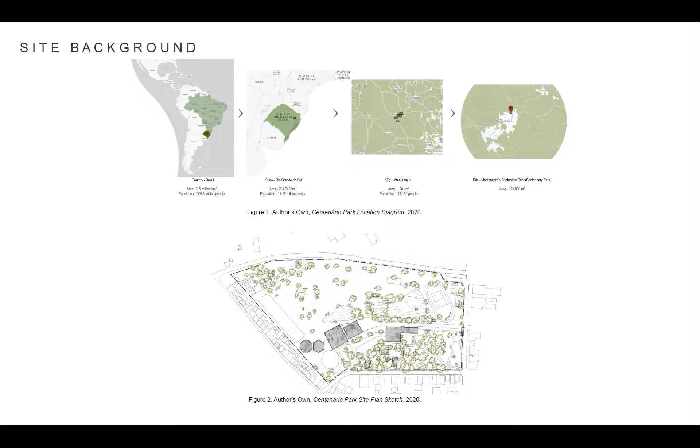Here, a location diagram. So we zoom into Brazil, then zoom into the southernmost state of Brazil called Rio Grande do Sul. Then we zoom into the city of Montenegro, and finally zoom into Centenario Park. Centenario means centenary, and that's because the park was founded on the city's 100th birthday in 1973.

The current problem being addressed in this thesis is the current rundown condition of the site. Because of neglect and vandalism over recent decades, the quality of the spaces and the buildings have declined drastically, also with the shutting down of facilities. And this is something that I witnessed as well living in the city when I was younger.

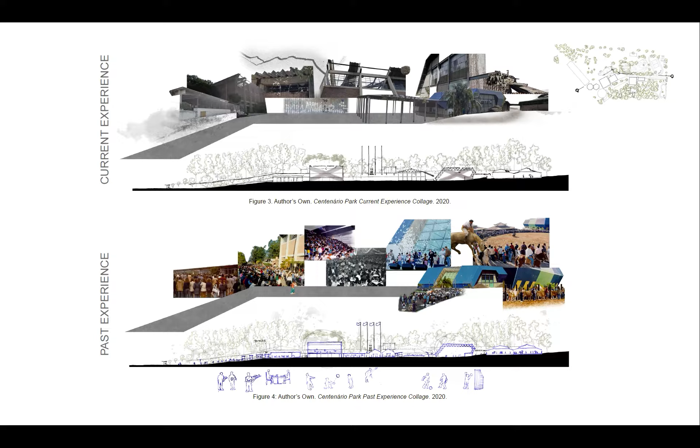The past experience of the site, however, is very different. It used to be a lively showground for cultural, recreational, and sports events of the region, a place of collective memory for people. So this study looks at bringing back some of this life to the current dilapidated site.

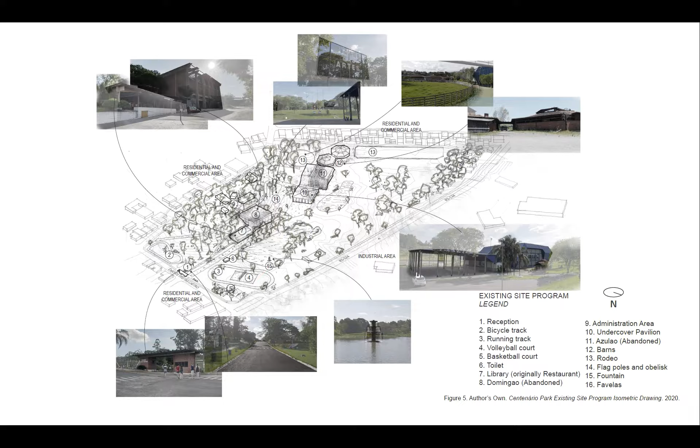And on the right, we can see a sign that reads City of the Arts, and that's placed in Centenario Park, acknowledging one of the city's titles in the region. Between the years of 1973 and 2019, there have been considerable developments both within the site area as well as the surrounding city.

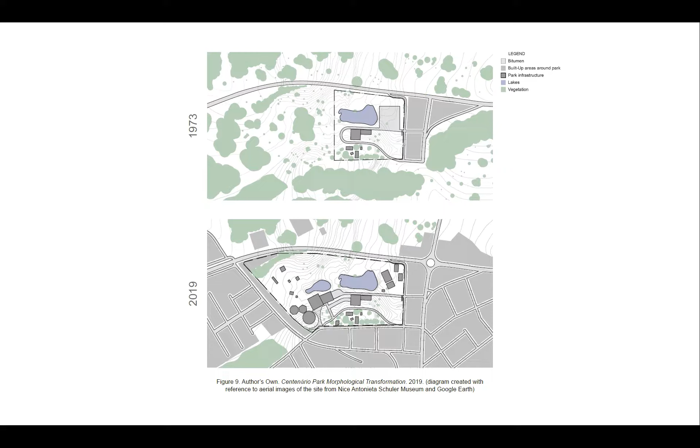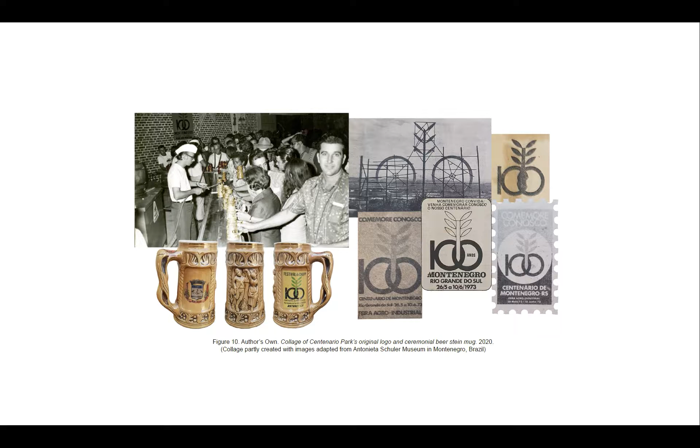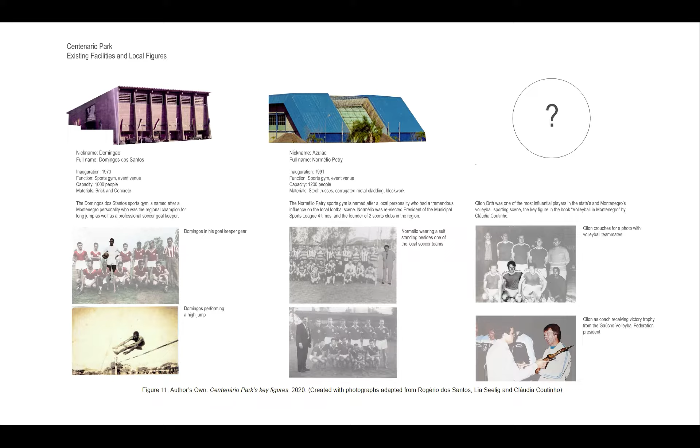And there's a logo that's associated with Centenario Park that you can see here, and it's something that's been largely forgotten over the course of time and something that I'd like to reinstate as part of the proposal. Also worth mentioning is that the two main buildings of the site, the sports gym buildings Domingão and Azulão that you see there, are named after important local figures of the region's sports scene.

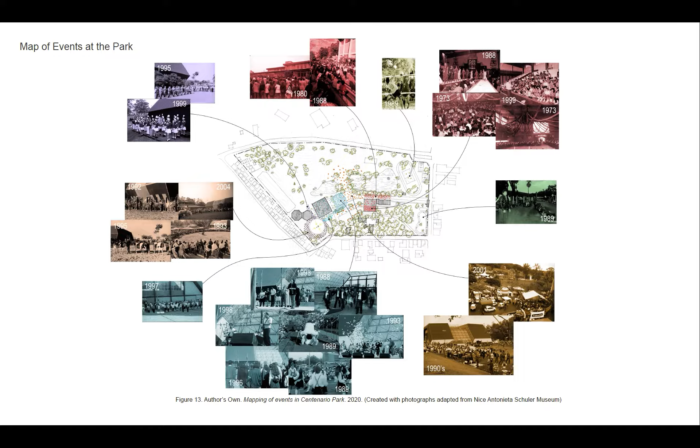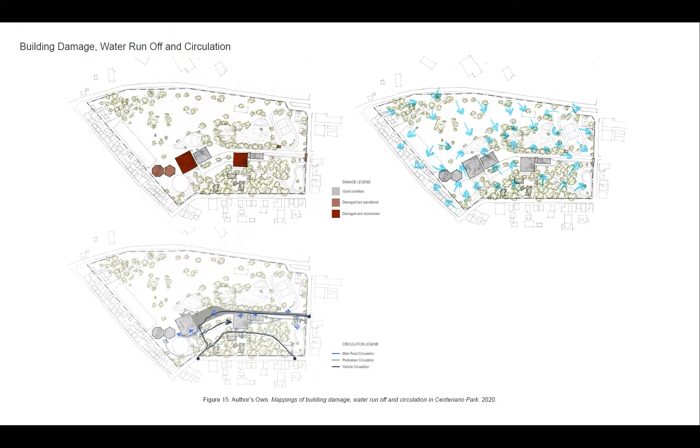I then conducted some mapping exercises here on the site plan: mapping zones, mapping events at the park to understand how people occupy the spaces, mapping key moments as we come into the site and traverse that central road of the park, mapping of building condition, water runoff and circulation, and some site section elevations and diagrams that are taken through the length of the park.

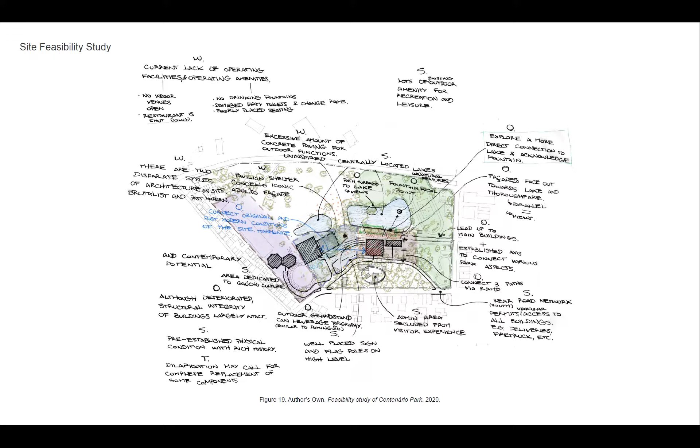Entering the methodology portion of the study, the first thing I did was come up with a set of design rules to help inform where and how to intervene in the park site. And that's because it has a very big area of 120,000 square meters, and there's a lot happening on the site.

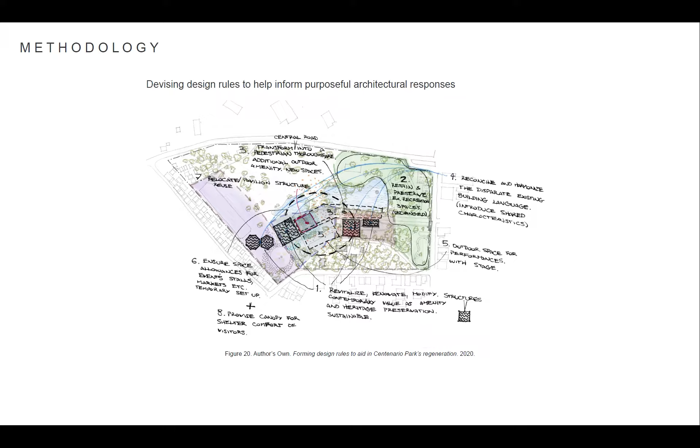So these rules outline that beyond the revitalization of the existing heritage structures, it also looks largely at the creation of outdoor spaces that can supplement the cultural and functional uses of Centenario Park, because there hasn't been noticeable development of these areas on the site.

And these spaces are to embody an architectural ideology that is Brazilian modernism. Now, the 20th century was a time where European design principles predominated at a national level, and a time where Brazilian architects were looking for ways to distinguish their buildings from those of Europe, and in this process, trying to find a uniquely architectural style that's referential of Brazil.

The following case studies that I'll show you are from Brazilian architects that align themselves to varying extents with this architectural ideology in their search for an authentic design style. And also, I believe that each one had a takeaway or a key lesson that could be reinterpreted in the context of Centenario Park. The first one is Lina Bo Bardi's SESC Pompeia in the city of São Paulo.

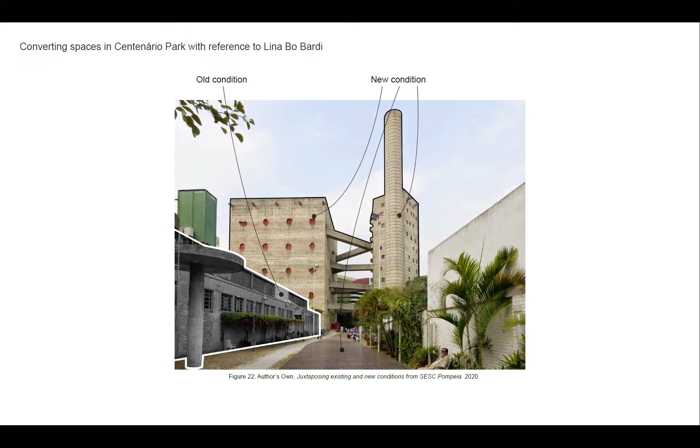It is a leisure center that consists of a revitalized heritage condition of the site, as well as the implementation of a surrounding environment to accommodate the new social program. And jointly, they form this leisure precinct in the city.

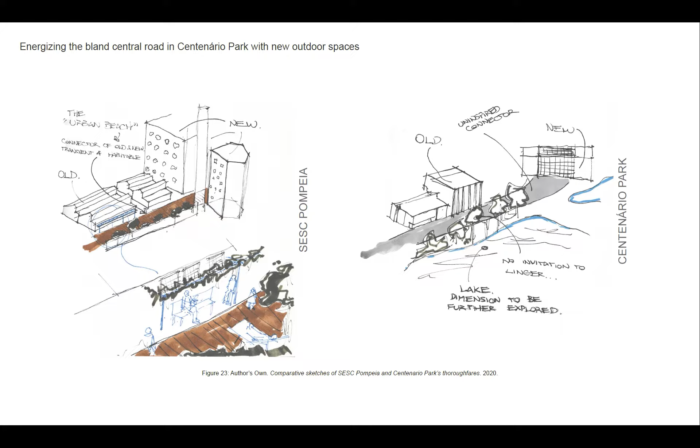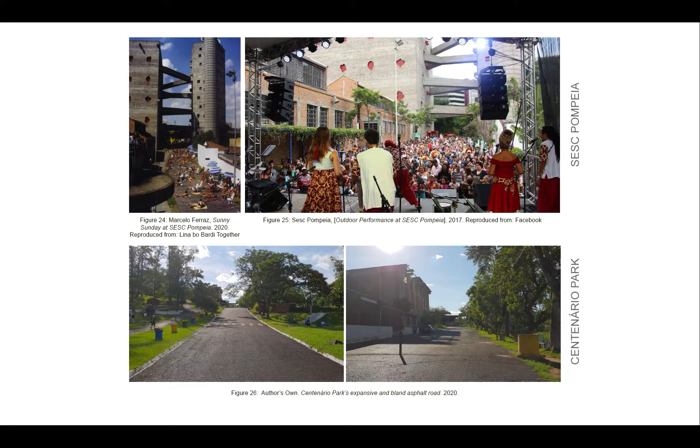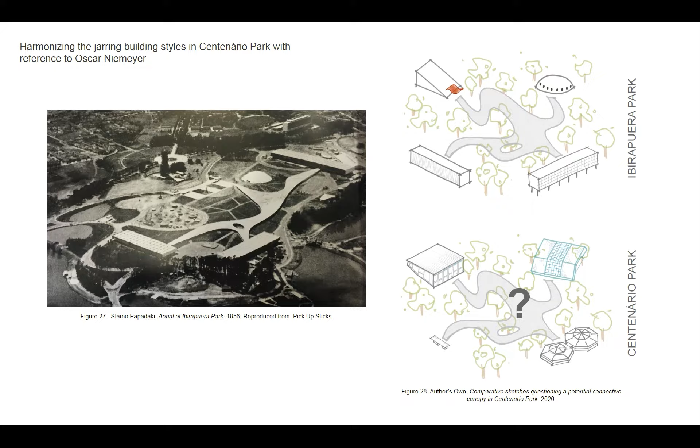I then looked at this precedent that is Ibirapuera Park by architect Oscar Niemeyer, where he uses a sensual concrete canopy to connect the different buildings of the site, and I started questioning whether a similar approach would be appropriate to Centenario Park, whether the introduction of a distinctly Brazilian architectural quality to be shared between the very different buildings of the site could help bring some level of harmony to them.

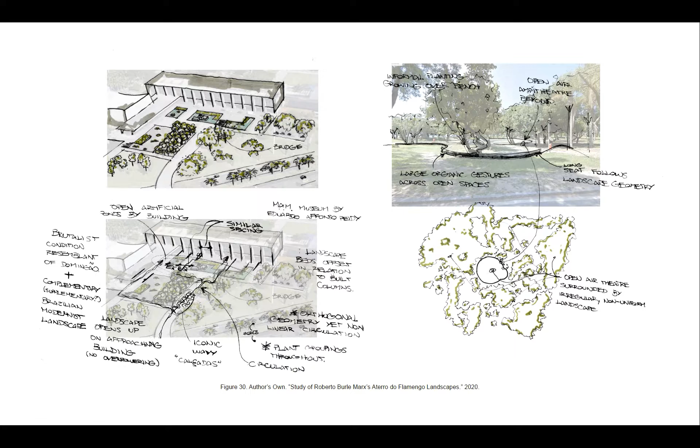I then looked at this precedent here from Roberto Burle Marx, that is the Flamengo Landfill Park. Now, Burle Marx is a landscape architect, and here he is designing a landscape to complement a brutalist structure of this project. And I also looked at another example from Burle Marx within the same project, except for a more open area, and how his landscape treatment is different.

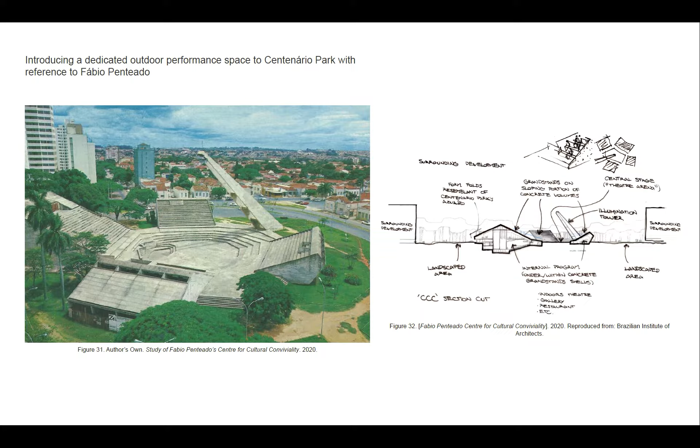In regards to the creation of a large-scale outdoor performance space, I looked at this precedent from Fábio Penteado called the Center for Cultural Conviviality in Campinas. And it is essentially a set of grandstands that configure a large-scale outdoor stage.

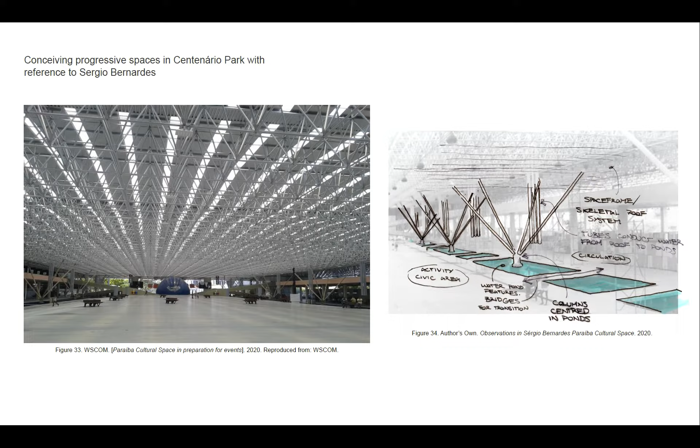And also in regards to public spaces, looking at this precedent from Sérgio Bernardes called the Paraíba Cultural Space, the use of a canopy that creates this sheltered open plan space that can be used as the community wishes.

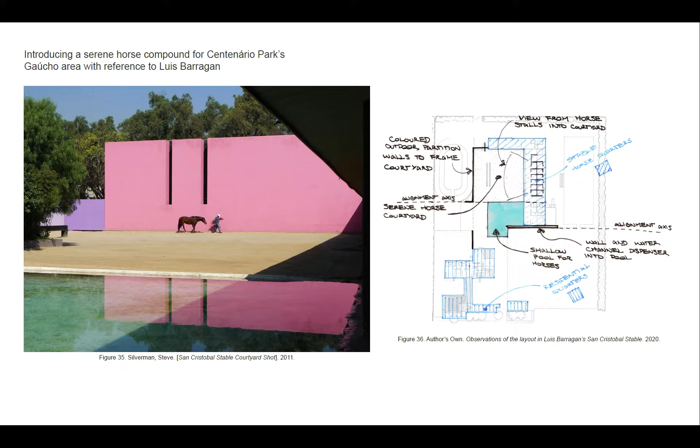And here the sixth and final case study is Luis Barragán, who is a Mexican architect, but his work with equestrian culture could be beneficial in a gaucho context, I thought. And so this is one of his stables in Mexico City.

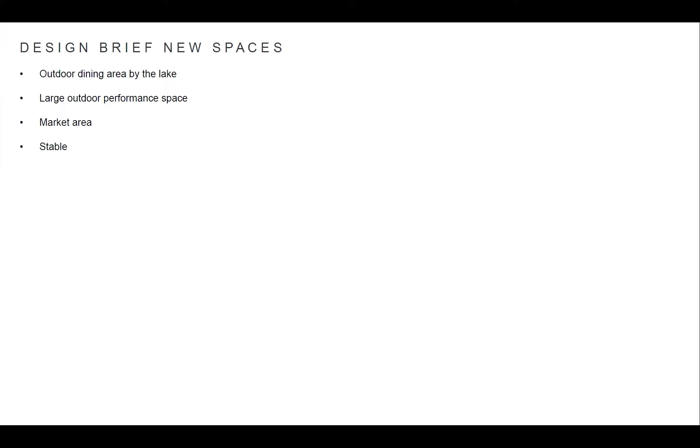The design brief has the following new spaces: an outdoor dining area by the lake, a large outdoor performance space, a market area, and a stable. In the document, I go into a lot more detail in relation to the design brief, both in terms of function and aspirations, but unfortunately I can't cover the entirety of it in this presentation.

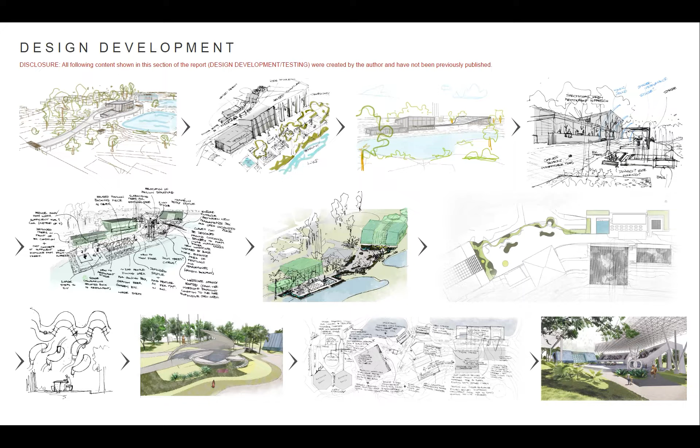The same I'll say for the design development of the project, because there's a lot there. But I will bring your attention to a few steps along the way that I thought were important, and this would be iteration number 7 that you see here.

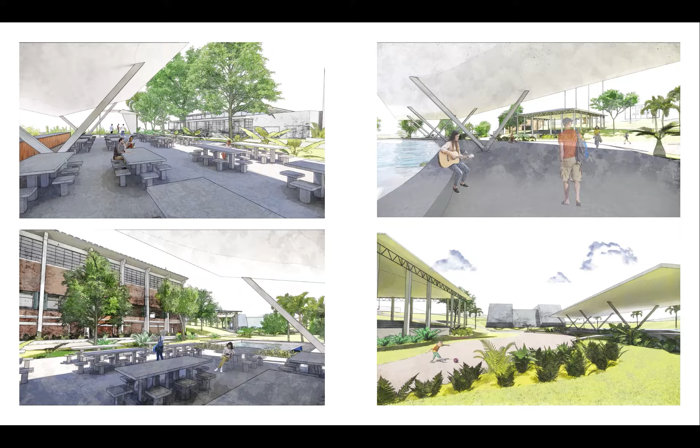Now, at this point in time, these new outdoor spaces were beginning to emerge. However, they felt very bland and generic, and they didn't really capture the boldness or ambition of Brazilian architecture, and so it just felt like a very safe proposal.

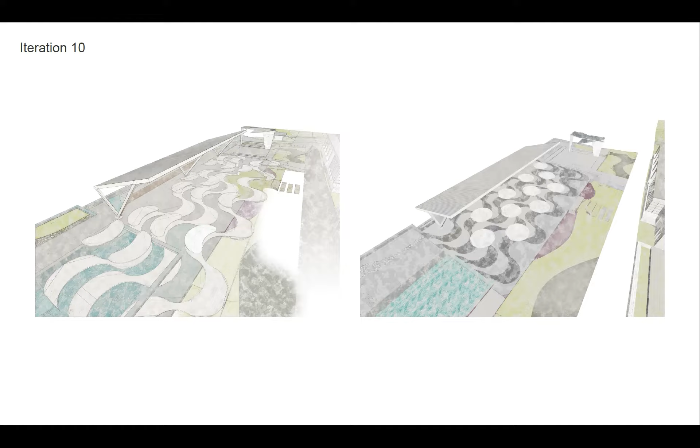A few weeks later, for iteration 10, I revisited these spaces and tried to infuse more of this Brazilian modernist quality in them with reference to the case studies analyzed. And the outcome were these structures that really looked like an Oscar Niemeyer and Burle Marx project.

It didn't really factor in ideas from any of the other architects I was studying. And at the same time, these felt like brand new structures on site that had little acknowledgement of the existing and very unique condition of the buildings or the natural features of Centenario Park. So it just didn't feel right for a meaningful architectural proposal.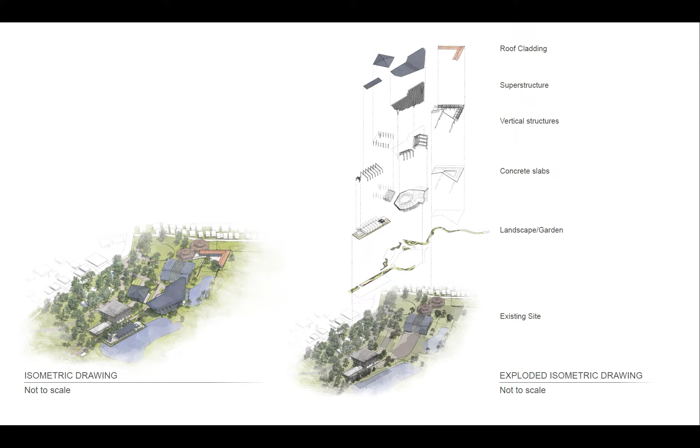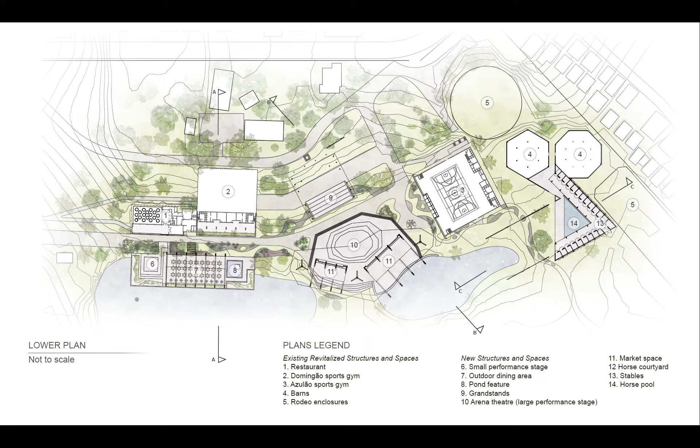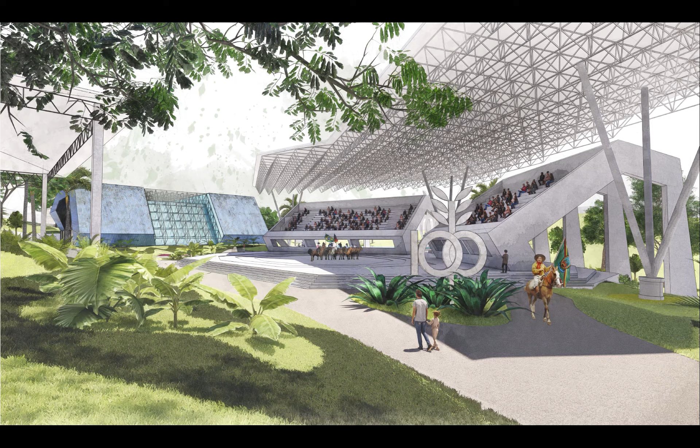With the new large-scale outdoor performance space, I think this came to be the most successful space developed in the study, and that is because it employs the ideas from Fábio Penteado and Sérgio Bernardes, but at the same time it mediates the architectural styles of the two sports gym buildings, which are very, very different. And it takes not only construction techniques from both, but also visual cues.

These new grandstands fold and are sculpted in the same way as the Azulão sports gym building, which you see here in this render as well. It's the blue structure. And also the space frame of this superstructure sheltering canopy alludes to this exposed skeletal system of the existing building as well. And in that way, it establishes a link between the new condition and the old condition in terms of architectural language.

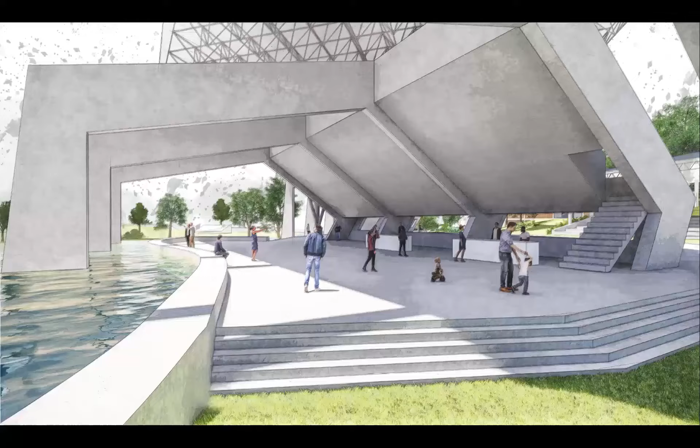And here we are bringing back that graphic that is the 100-year logo of Centenario Park at the entrance to this area. The underside of these grandstands can be used for markets, exhibitions, and other activities as well. It is quite a flexible space. And in this area, we can also see how the grandstands interact with existing conditions of the site.

So these concrete portal frames here fold and then insert themselves into the lake, so there is an interaction with the natural condition of the site. And also through cutout voids on these forms, we can visually connect the people at the central stage that we can see here to the people that are behind or under these grandstands.

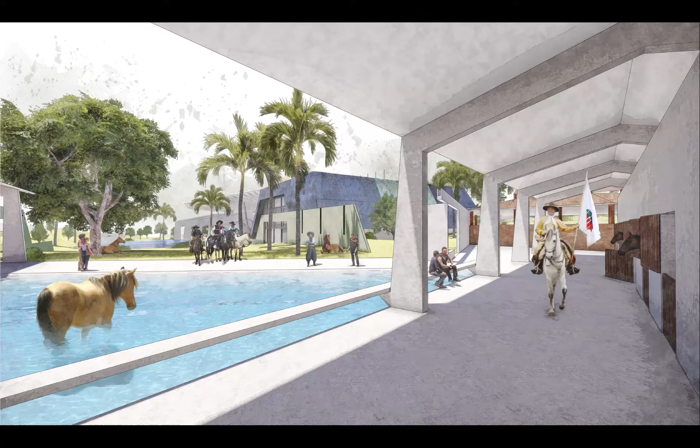And then finally here is the stable design that incorporates some ideas from Luis Barragán. It looks at extending the existing walls from the barn buildings on site and then redirecting people back towards the lake and the other area beyond that you can catch a glimpse of in the background. Also forming a courtyard for the horses in between the two rodeo spaces.

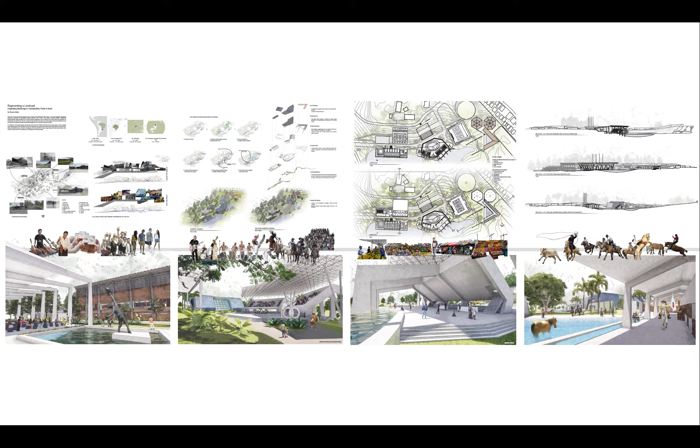And then here are the final A0 panels you can see, and how even though we're taking ideas from various architects, there is still a consistency in the architectural language that helps tie it all together. And that's it. Thank you.